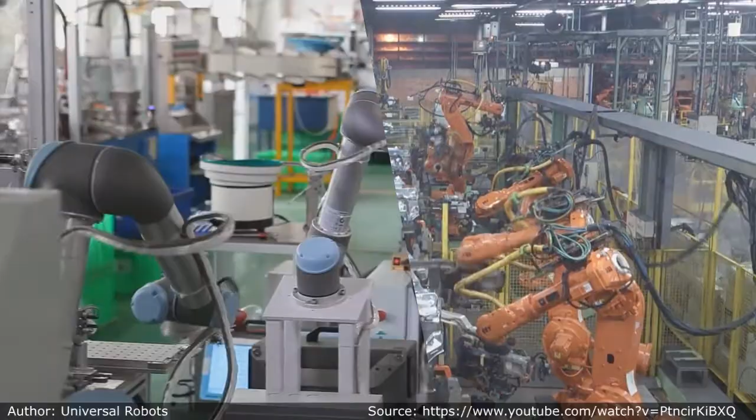Cobots, or collaborative robots, present a completely different approach to the regular, well-known industrial robots. They go against the reputation of their predecessors, which intimidated with additional safety requirements, huge costs, long time of implementation, and steep learning curve. With constantly shrinking sources of labor, cobots strive to empower the worker with tools previously unattainable.

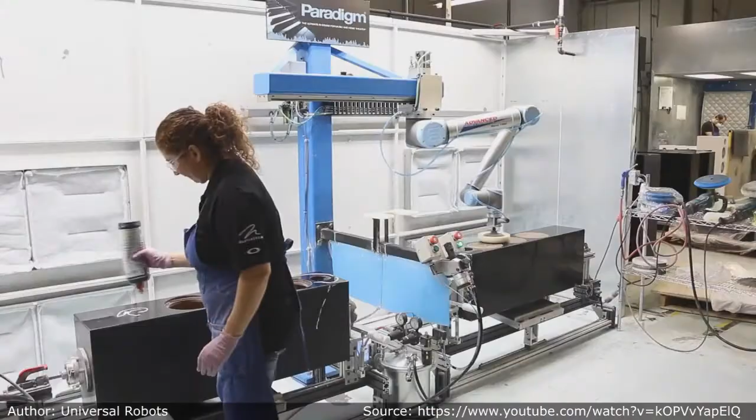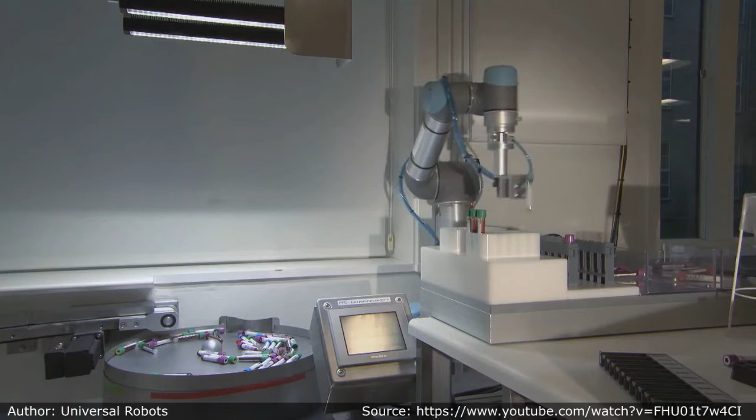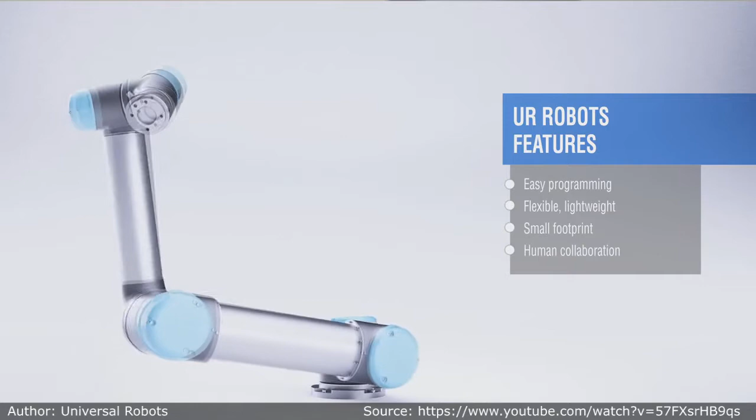Nowadays, we hear more and more about implementation of collaborative robots in all sorts of applications. The great success of cobots, however, does not originate back to the giants of robots manufacturing, but a new company with a vision for a more human-friendly automation. It was 2005 when Universal Robots started chasing their dream, and soon after, the giants followed in their footsteps. And that is when cobots really took off. But let us start from the very beginning, shall we?

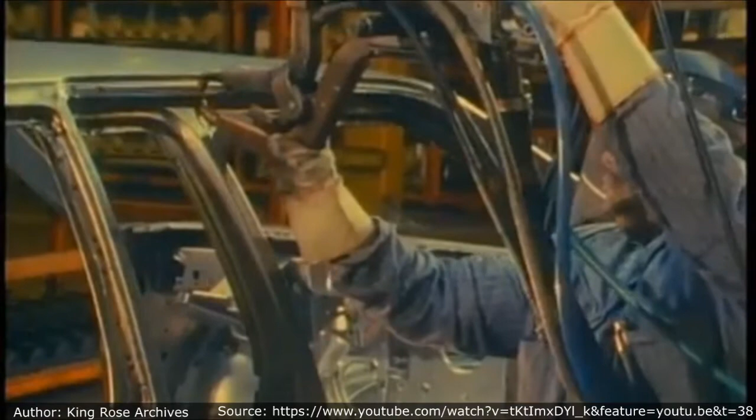Everything started when the Occupational Safety and Health Administration had concerns with the way that ergonomic issues were handled by the manufacturing industry in the late 90s. General Motors, with the help of professors Michael Peshkin and J. Edward Colgate from Northwestern University, set out to find a solution to this problem. Colgate and Peshkin started looking for a way to improve ergonomics for human workers without introducing new risks from robots, which is when they came up with the idea that robots and people could in fact work in partnership.

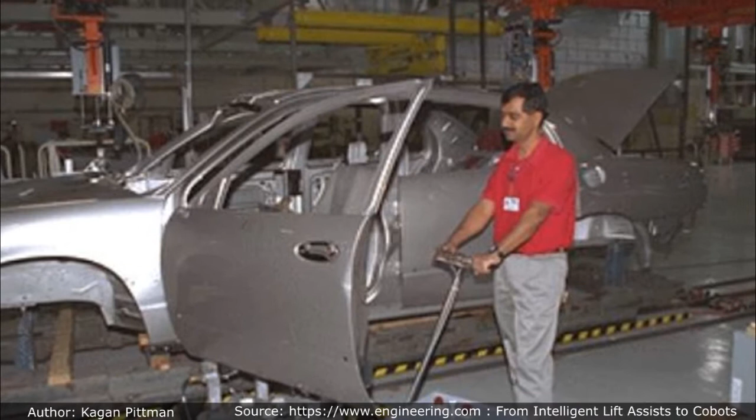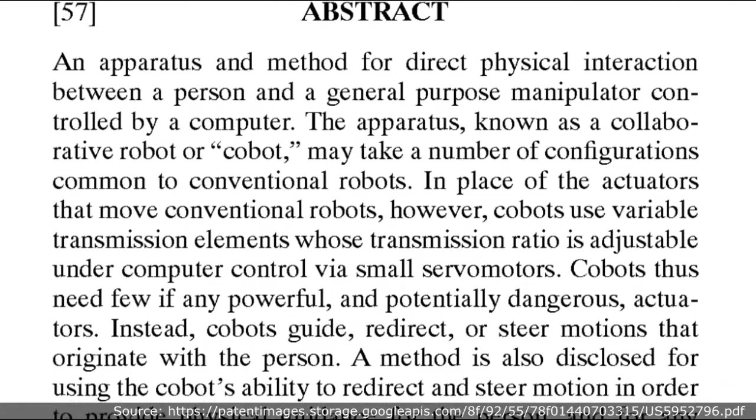Later on, as the interaction between workers and robots became more apparent, they introduced the term collaborative robot or cobot, which led to filing a patent in 1997, describing cobots as an apparatus and method for direct physical interaction between a person and a general-purpose manipulator controlled by a computer. Not too long after, a research team at the University of Southern Denmark started comparing existing automation solutions to market needs, giving them an opportunity to reinvent the industrial robot.

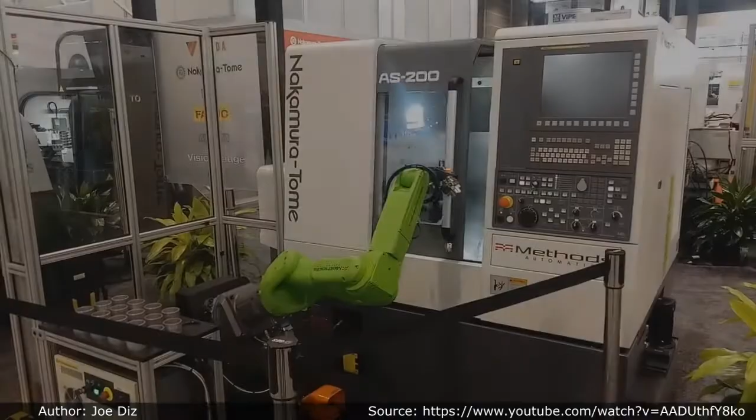In 2005, 3 members of that research team founded Universal Robots, which led to creating the UR5, the world's first collaborative robot able to operate safely alongside people. In 2012, a bigger version of the cobot, UR10, is launched globally, capable of longer reach and handling greater payload. With the success of Universal Robots, collaborative robotics is recognized as a viable new class of robots, which leads to larger robot manufacturers launching and developing cobots.

As the interest in cobots grows rapidly and they start to be considered a standard, ISO publishes a specification containing guidelines on how to ensure the safety of human workers in collaborative robotics systems.

Nowadays, collaborative robots are associated with robots that can be used without fencing and share workspace with humans. But that is not the only feature that makes them what they are. In fact, according to international standards, there are 4 types of collaborative features for robots: safety monitored stop, hand guiding, speed and separation monitoring, and power and force limiting. Let us discuss these features briefly.

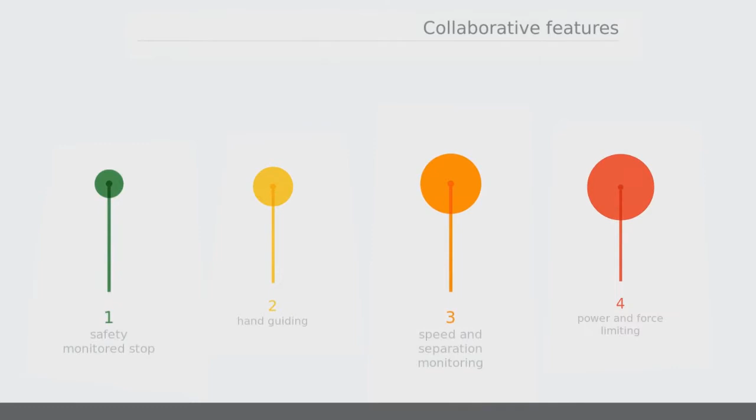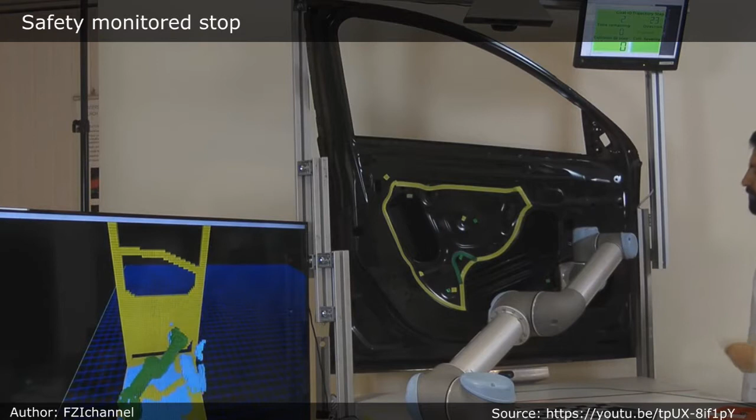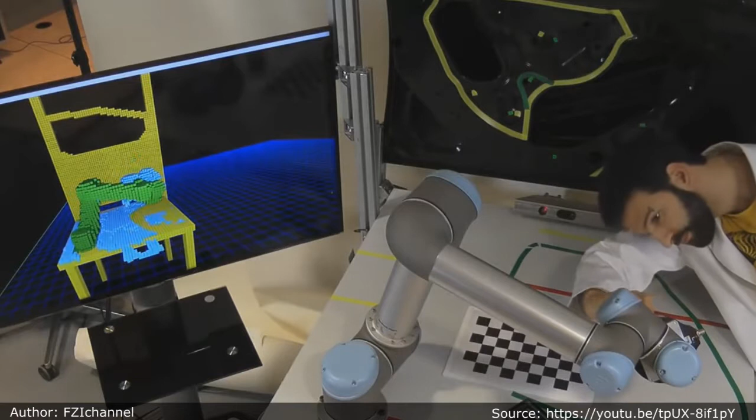Safety monitored stop is used when a robot is mostly working on its own, but occasionally a human might need to enter its workspace. For example, when a heavy part has to be handled by a robot and a worker needs to do a secondary operation on it. In such a case, if a human enters a restricted area in a predetermined safety zone, the robot will stop all its movements. It is important to notice that the robot is then not shut down, but the brakes are on. These types of robots are most efficient when the human-robot interaction is limited. Otherwise, a lot of time could be wasted as the robot continuously stops for human interruptions.

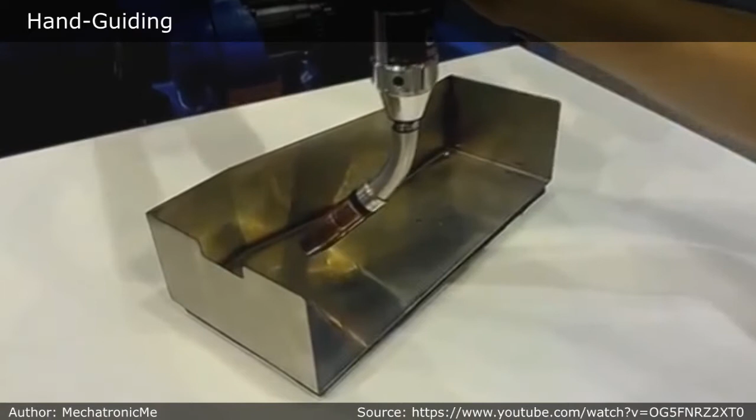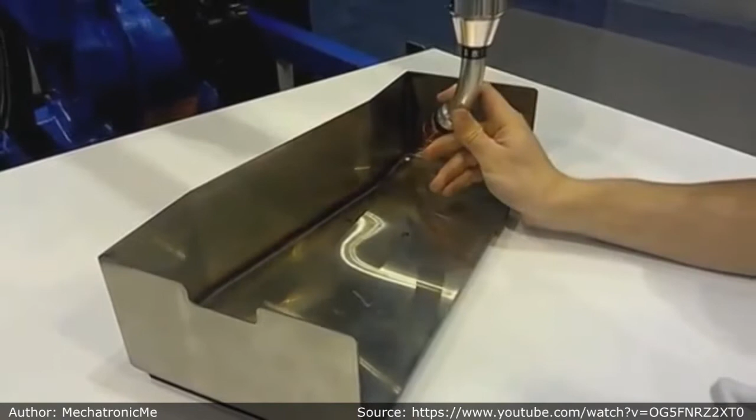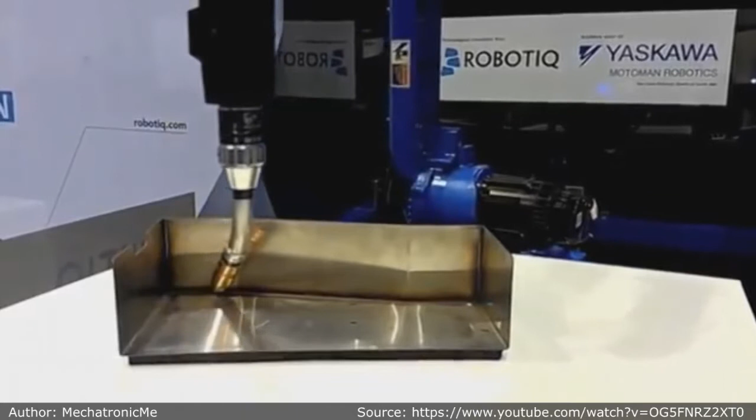Hand guiding can be used for path teaching, for example in welding applications. This collaborative feature allows for quick and easy reconfiguration of a process. However, you should notice that this type of collaboration may also use regular industrial robots, but with an additional device sensing the forces that the worker is applying on the robot tool. This type of collaboration, however, only applies to the robot while it is using this feature, which means that while functioning in other modes, the robot still needs additional safeguarding.

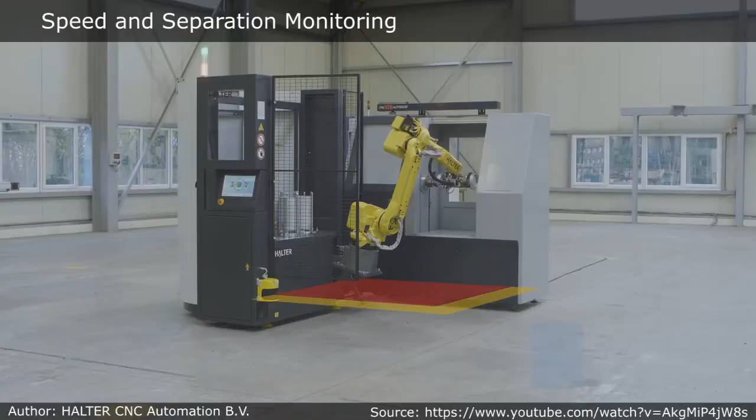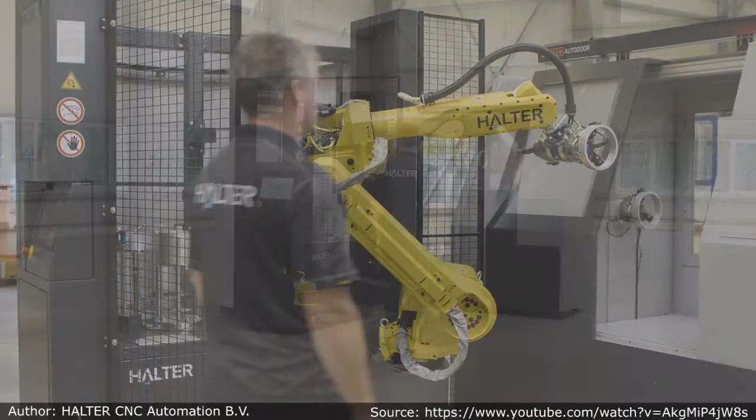A robot may also be considered collaborative if equipped with a speed and separation monitoring system, where the environment of the robot is monitored by lasers or a vision system that tracks the position of workers. The robot will act according to the functions defined for different pre-designed safety zones. If the human is within a certain safety zone, the robot will respond with designated speeds and stop when the worker comes too close. This collaborative feature is used for operations that require frequent worker presence.

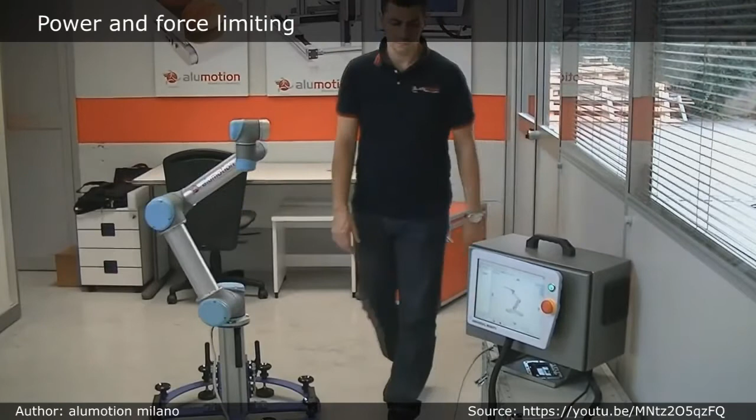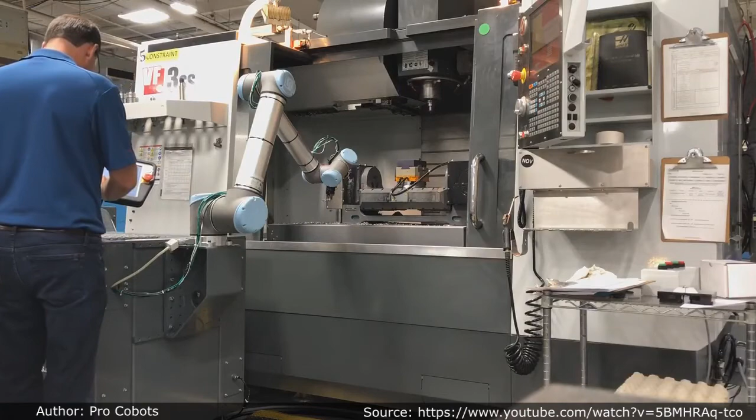Power and force limiting is the feature that most people associate with cobots. It allows the robot to work alongside humans without any additional safety devices. The robot can feel abnormal forces in its path and come to a stop when an overload in terms of force is registered. These robots' physical design is focused to be as harmless as possible, which means rounded parts, no exposed motors, or loose wires. All of this allows for direct collaboration with the worker for a variety of tasks.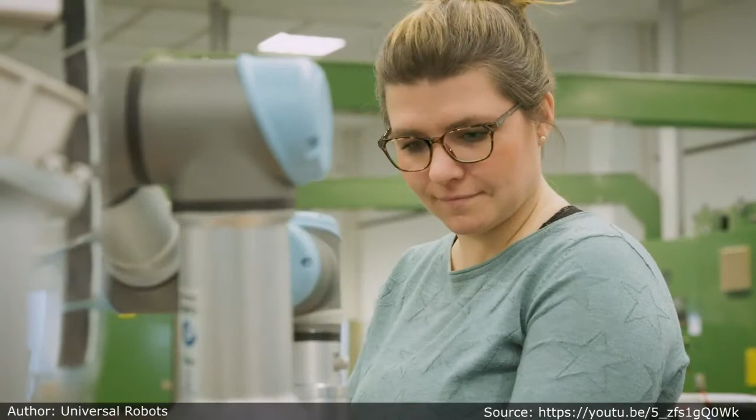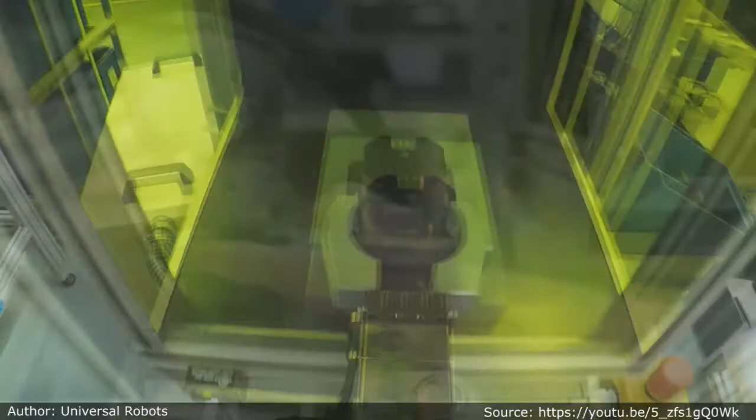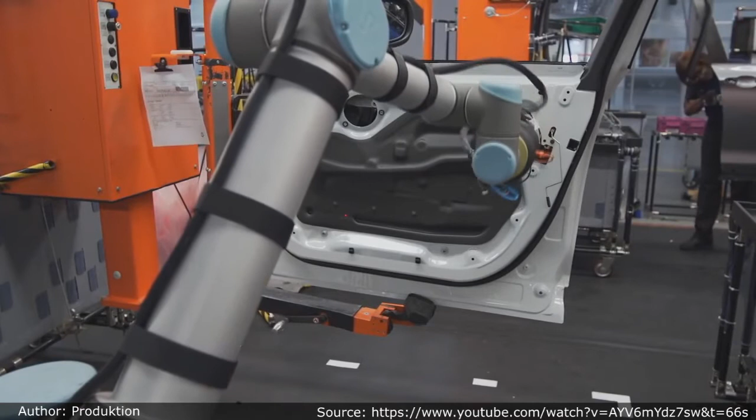In conclusion, the field of collaborative robots is vast and rapidly changing, while constant pressure on automation of manufacturing processes is pushing the industry into creating ecosystems consisting of both humans and robots, where cobots provide a healthy solution to relieving workers of tiring, repetitive, or mundane operations. This change in the industry may be the necessary step on the way to creating nearly risk-free working environments.

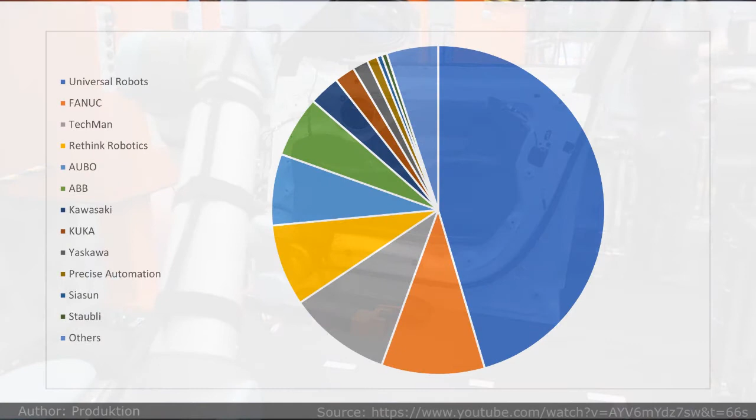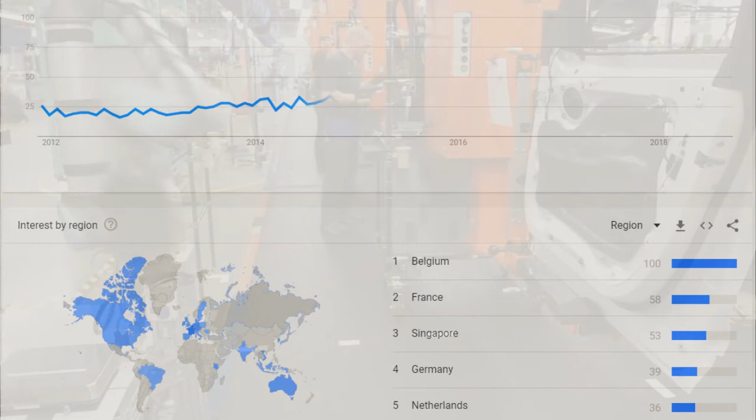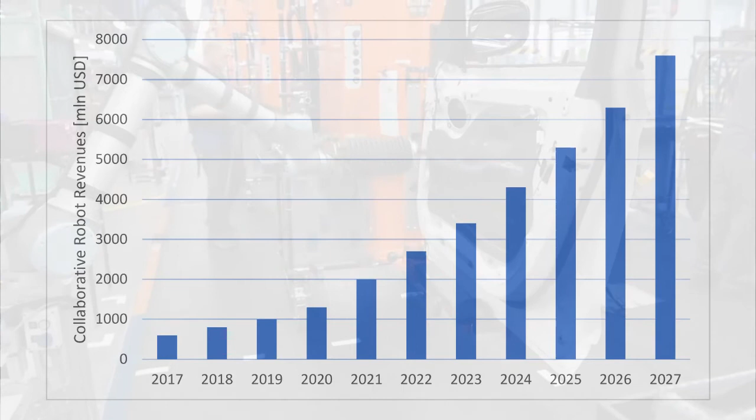So far, Universal Robots hold around 50% of market revenues, while the rest is divided between the prominent industrial robot manufacturers. And so, as the interest in collaborative robots rises, so does their market value. According to global market analyses, annual revenues of collaborative robots are forecast to reach $7.6 billion in 2027, accounting for 29% of the entire industrial robot market.